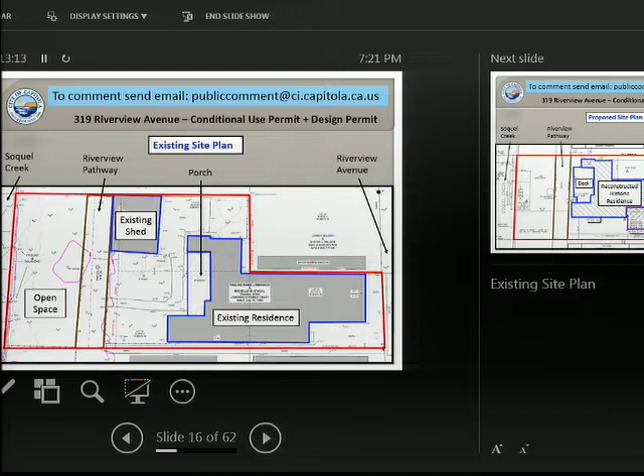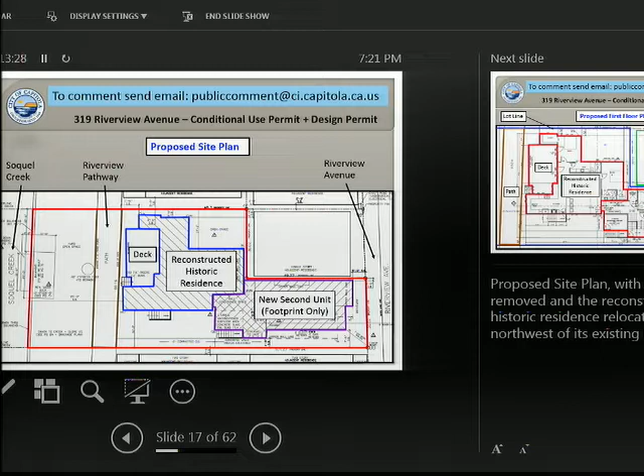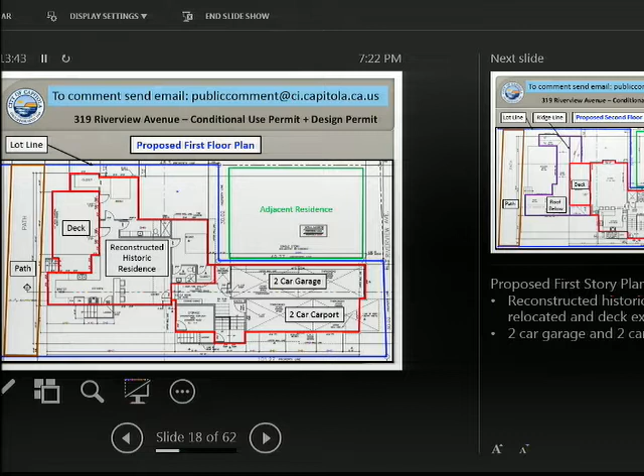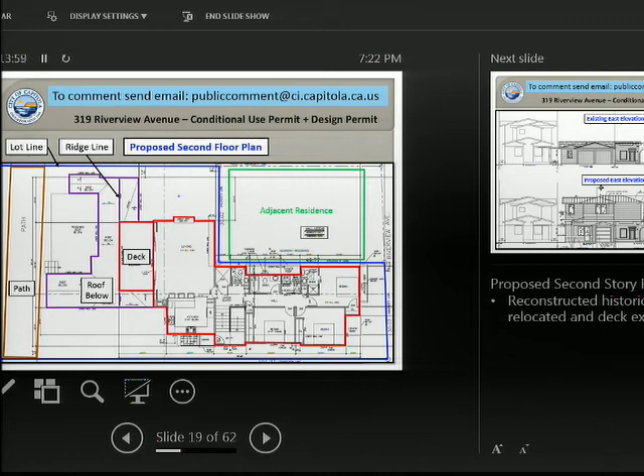The proposed second-story plan has the reconstructed historic residence relocated and the deck extended. The deck of the second story extends to the ridge line of the reconstructed historic structure.

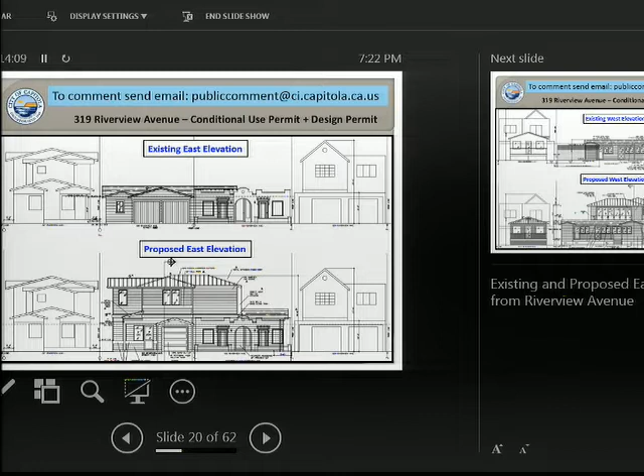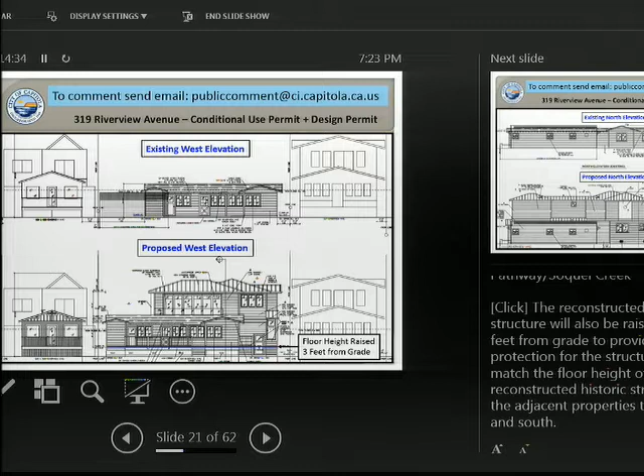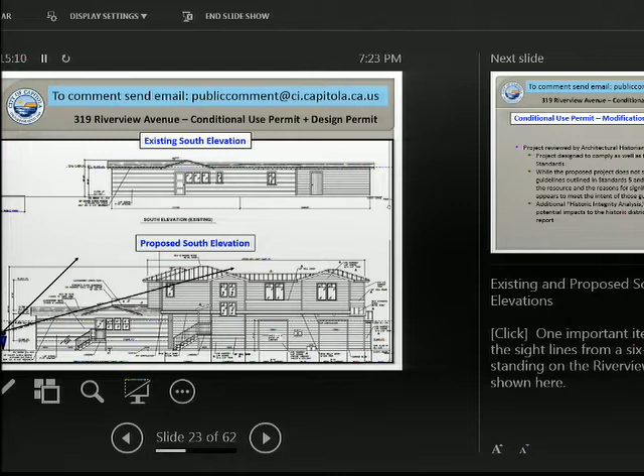Any modification to a historic structure must comply with the Secretary of the Interior standards to qualify for a CEQA, or California Environmental Quality Act, exemption.

Architectural historian Leslie Dill reviewed 4 revisions of the project for compatibility with the Secretary of the Interior standards. Upon the 4th submittal, Ms. Dill found that the proposed residential rehabilitation and addition project has been designed to comply as well as feasible with the standards, and that while the proposed project does not strictly meet the guidelines outlined in standards 5 and 6, due to the nature of the resource and the reasons for significance, the project appears to meet the intent of those guidelines. Therefore, the project qualifies for a CEQA exemption.

Capitola Municipal Code, Section 17.60.030C, states that in considering an application for a conditional use involving a material change of a historic feature, the Planning Commission shall weigh the benefits of the proposed change against the detriment to the public welfare caused by a change in the feature. In approving any such change, the Commission shall make one of the following findings.

Either 1, that the action proposed will not be significantly detrimental to the historic feature in which the change in use is to occur, or the applicant has demonstrated that denial of the application would result in hardship so substantial as to outweigh the corresponding benefit to the public of maintenance of the historic feature or structure. Based on the historic report, the finding can be made that the project will not be significantly detrimental to the historic feature in which the change in use is to occur.

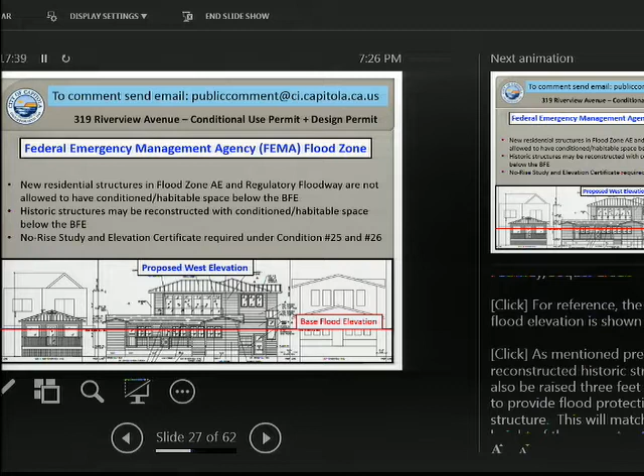Here are the existing and proposed west elevations again. The red line here is the FEMA base flood elevation of 19 feet. This is showing that the reconstructed historic structure will be raised 3 feet.

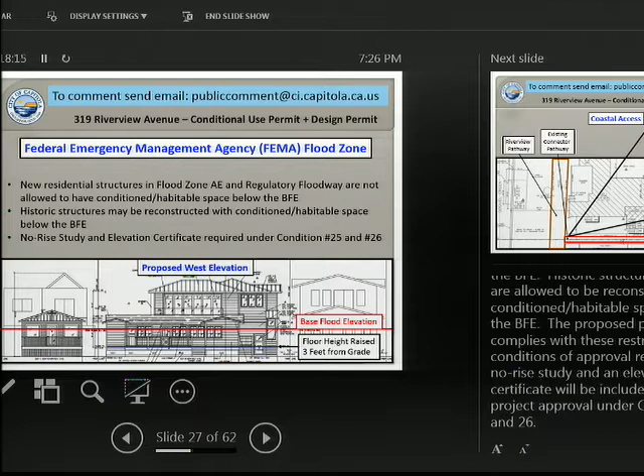New residential structures in this flood zone are not allowed to have conditioned or habitable space below the base flood elevation. Historic structures, however, are allowed to be reconstructed with conditioned or habitable space below the base flood elevation. The proposed project complies with these restrictions, and conditions of approval requiring a no-rise study and an elevation certificate will be included in a project approval under conditions 25 and 26.

There's also an existing pathway between the residences at 319 Riverview Avenue and 317 Riverview Avenue that leads from Riverview Avenue to the Riverview Pathway. The path is not designated on the City of Capitola's Coastal Land Use Plan Shoreline Access Map.

However, the California Coastal Commission expressed concerns related to the elimination of the pathway proposed in the plan set that went to the Architecture and Site Review Committee on November 13, 2019. In subsequent revisions, the gates were removed from the proposed site plan and landscape plan, and those plans were updated to show the pathway remaining.

Condition of approval number 27 has been included to ensure that the pathway is kept free from obstructions so that the public access to the Riverview pathway is maintained. With the inclusion of this condition of approval, staff was able to make the required findings for the appealable coastal development permit.

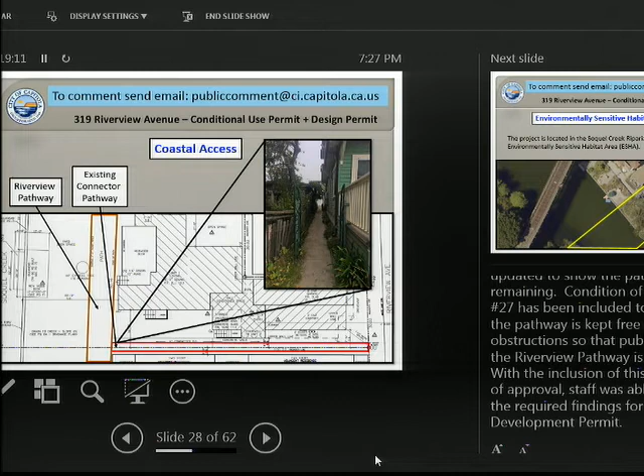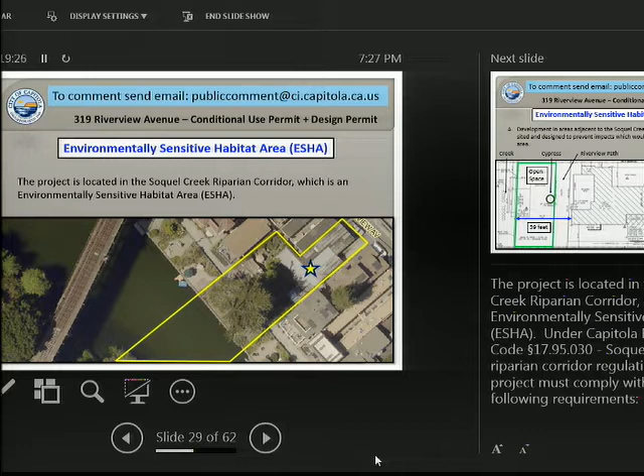The project is also located in the Soquel Creek riparian corridor, which is an environmentally sensitive habitat area. Under the Capitola Municipal Code, Soquel Creek riparian corridor regulations, the project must comply with the following requirements.

A. Development in areas adjacent to the Soquel Creek riparian corridor shall be sited and designed to prevent impacts which would significantly degrade the area. The proposed development is located 39 feet from the bank of the Soquel Creek. There are no significant proposed changes to the Riverview pathway or the portion of the lot between the Riverview pathway and the Soquel Creek, and the large mature cypress tree is to remain. The development is sited and designed to prevent impacts which would significantly degrade the area.

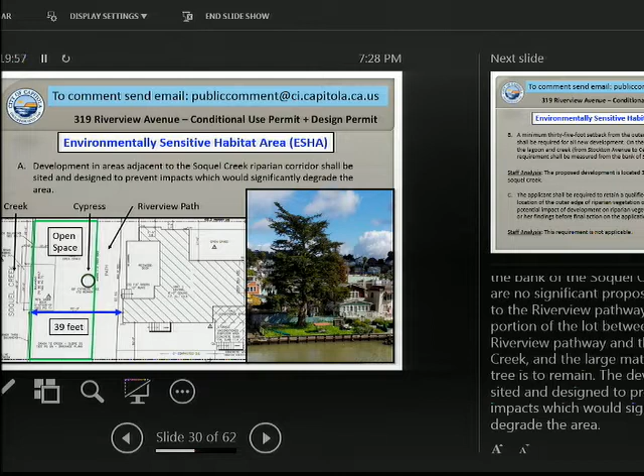B. A minimum 35-foot setback from the outer edge of the riparian vegetation shall be required for all new development. On the heavily developed east side of the lagoon and creek, from Stockton Avenue to Center Street, the setback requirement shall be measured from the bank of the Soquel Creek. The proposed development is located on the east side of the Soquel Creek and is 39 feet from the bank, so the proposed development complies with this requirement.

C. The applicant shall be required to retain a qualified professional to determine the location of the outer edge of riparian vegetation on the site and to evaluate the potential impact of development on riparian vegetation. This actually is on the heavily developed east side, so this requirement is not applicable.

D. Removal of native riparian trees within the Soquel Creek riparian corridor shall be prohibited unless it is determined by the Community Development Director that such removal is in the public interest by reason of good forestry practice, disease of the tree, or safety considerations. The proposed project does not include the removal of any native riparian trees within the Soquel Creek riparian corridor, and the large mature cypress tree located between the Riverview pathway and Soquel Creek is to remain.

E. Snags or standing dead trees shall not be removed unless in imminent danger of falling. Project, as mentioned before, does not include the removal of any standing dead trees.

F. Coastal development permit applications within or adjacent to the Soquel Creek riparian corridor shall contain a landscaping plan which sets forth the location and extent of any proposed modification to existing vegetation and the locations, kinds, and extent of new landscaping. A landscape plan is included in this plan set for the proposed development. Approval of the landscape plan by the Community Development Department is included in the conditions of approval under condition number 6. G. Conformance to the Capitola Erosion Control Ordinance shall be required.

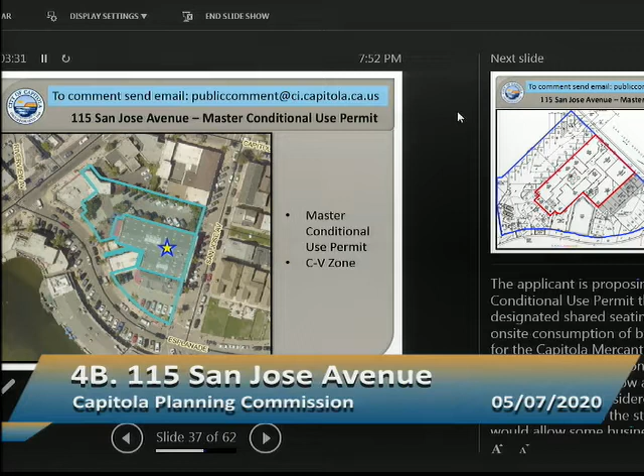Okay, that brings us to the next public hearing, which is item 4. Is it 4? Anyway, it's public hearing B, 115 San Jose Avenue. This is a master conditional use permit for the mixed-use Capitola Mercantile, including specific allowances for to-go food establishments, tasting rooms, retail sales, personal services, and designated shared seating areas with on-site consumption of beer and wine located within the Central Village zoning district. May I have the staff report, please?

Thank you, Vice Chair Ruth. This is Associate Planner Matt Orbach again. I want to apologize ahead of time, this report is a lot more text heavy because it's mainly about conforming with the regulations here. So the applicant is proposing— Can you speak a little closer into the microphone? It's very difficult to hear. Yes, sure, please. It's usually the last complaint about my loud voice.

The applicant tonight is proposing a master conditional use permit that includes designated shared seating areas with on-site consumption of beer and wine for the Capitola Mercantile within the Central Village zoning district. As mentioned, the permit would allow a variety of use types to be considered as permitted uses in the structure, and would allow some businesses that sell alcoholic beverages to utilize the interior and exterior quasi-public seating areas as a shared premises for consumption of alcohol.

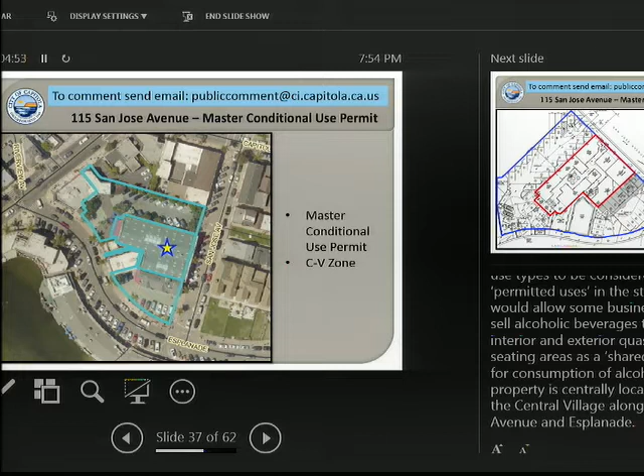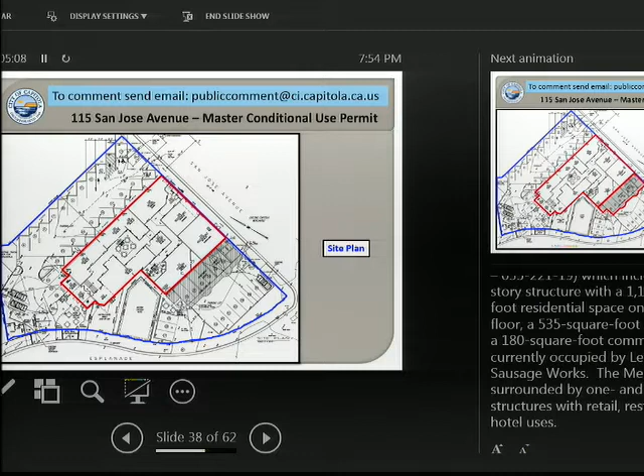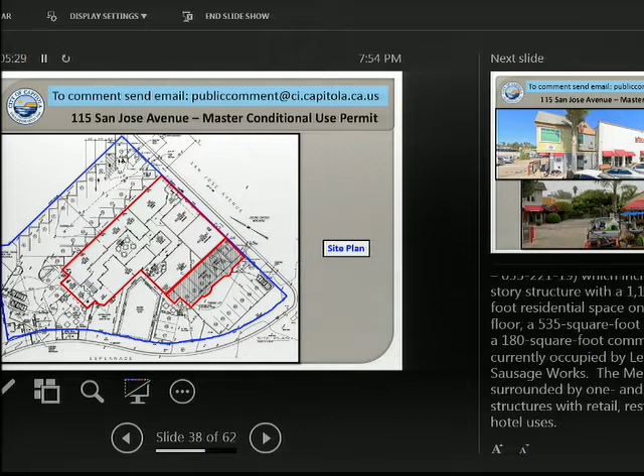The property is centrally located within the Central Village along San Jose Avenue and Esplanade. The Capitola Mercantile contains 11 commercial tenant spaces totaling 8,735 square feet, currently a mix of retail and restaurant establishments. The development also includes the adjacent building to the south, a 2-story structure with a residential space on the second floor, a 535 square foot garage on the first floor, and a 180 square foot commercial space on the first floor, currently occupied by Left Coast Sausage Works. The Mercantile is surrounded by 1- and 2-story structures with retail, restaurant, and hotel uses.

And here are a couple of pictures, just so that you can get a little bit of color before we go into the text.

So what is a master conditional use permit? A master conditional use permit explicitly allows a variety of principally permitted and conditionally permitted uses as permitted uses within a specific location. A tenant may change one use to another administratively if the proposed use is established as an allowed use in the master conditional use permit. Master conditional use permits are regulated under the Capitola Municipal Code.

Now I'm going to go through each of the requirements, and I warn you there are a lot. A: to qualify for a master use permit, more than 10,000 square feet of building must be located upon a parcel or multiple adjoining parcels under one ownership at the time the first tenant use permit is utilized. The total square footage of the Capitola Mercantile and the adjacent structure with a residential unit and one commercial suite, the two structures regulated under the proposed permit, is 10,635 square feet, so the project qualifies for a master conditional use permit.

B: the property must conform to the city parking and landscaping requirements. I split these onto two slides, so this first staff analysis is just in terms of parking. The existing uses in the Capitola Mercantile require 44.45 parking spaces, but there are only 41 parking spaces provided on the site. However, under conditional use permit 05035, which permitted the expansion of Caruso's from a takeout restaurant to a standard sit-down restaurant, 41 parking spaces were found adequate because uses in a mixed-use development have different peak use time periods and therefore combined require less parking than if the same land uses were separately developed. The uses included in the proposed master conditional use permit would maintain parking at the current level of 41 spaces.

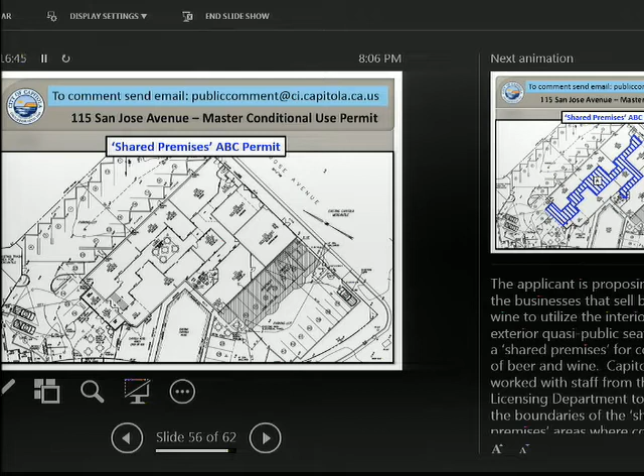So what is that shared premises area I keep referring to? The applicant is proposing to allow the businesses that sell beer and wine to utilize the interior and exterior quasi-public seating areas as a shared premises for consumption of beer and wine. Capitola staff worked with staff from the state ABC licensing department to establish the boundaries of the shared premises areas where consumption of alcohol will be allowed.

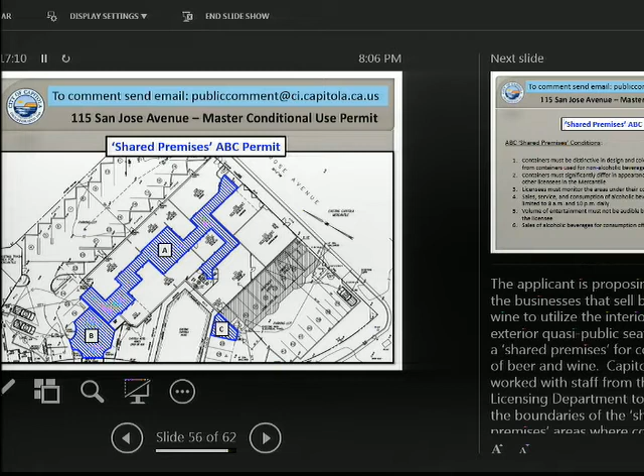These areas include the quasi-public seating areas in the lobby in the center of the building, a proposed outdoor patio adjacent to the northwest entrance to the building, and a small proposed outdoor patio adjacent to the southwest entrance to the building.

Next slide, please. The ABC staff also established conditions for ABC license applications for the mercantile. Businesses wishing to utilize the shared premises seating areas would apply for a Type 41 on-sale beer and wine eating place license. The shared premises conditions are as follows.

1. Containers must be distinctive in design and color and be easily distinguishable from containers used for non-alcoholic beverages. 2. Containers must significantly differ in appearance from containers utilized by other licensees within the mercantile. 3. Licensees must monitor the areas under their control.

4. Sales, service, and consumption of alcoholic beverages in or on the patio areas is limited to 8 a.m. to 10 p.m. daily. 5. Volume of entertainment must not be audible beyond the area under control of the licensee. And 6. Sale of alcoholic beverages for consumption off the premises is prohibited.

Once licensed, all licensees would be responsible for the shared premises, including any violations of the law occurring on the licensed premises.

And the last area that we wanted to cover is the Capitola Wine Bar. Suite 110, which is the current location of Capitola Wine Bar, is permitted as a retail wine shop and tasting room with 6 seats or less under conditional use permit 06011.

In the 2019 parking study for the mercantile, however, it was identified as a restaurant use, so the parking demand for a full restaurant is already accounted for in the existing on-site parking of 41 spaces. Staff has listed restaurant on the list of suites with specifically permitted uses within the master conditional use permit. The master conditional use permit would make the current use of the property compliant.

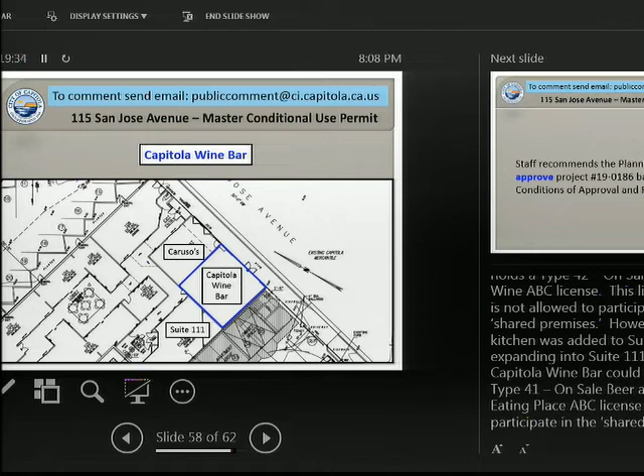This license type is not allowed to participate in the shared premises. However, if a kitchen was added to Suite 110, the Capitola Wine Bar, by expanding into Suite 111, could apply for a Type 41 on-sale beer and wine eating place ABC license and participate in the shared premises. Next slide, please.

So with that, staff recommends the Planning Commission review and approve application number 190186, subject to the conditions below and based upon the findings. If the Planning Commission does choose to deny the application, the language from the municipal code should be included in the motion for denial, and I have that language available if it's needed.

Okay, thank you, Matt, for your presentation. Are there any questions for staff?

Commissioner Welch? Vice Chair Booth, I do have one question. There's a lot of information there, Matt.

So I understand that under Condition 9, that the businesses that sell or dispense distilled spirits have their license, and that they are not allowed to utilize the shared premise area. But it didn't really identify the arcade area as a shared area, and that would be a concern of mine, that we keep alcohol out of there.

Is that something that's still covered under that? Yes, the alcohol would not be allowed in the arcade areas. That's not part of the shared premises, and it was actually discussed on our site visit with representatives from the ABC, the chief of police, planning staff, and the owner's representative. During that on-site visit with the ABC, they'll have strict regulations about signage and where alcohol is allowed and not allowed, so signs would be up prohibiting alcohol from the arcade.